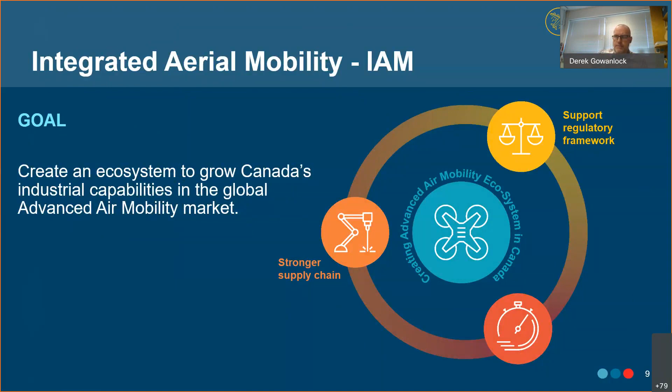To do that, we've basically broken down the program into 2 innovation domains. I'll talk on this slide for a couple of minutes, then we have one more slide to express all this. We have the vehicle domain and then the operational domain, and then we break that down into master projects.

On the integrated design side of things, we're looking at technologies around VTOL propulsor noise, VTOL cabin noise. On the airworthiness and crashworthy structures dimension, we're looking at UAM structure and safety for crashworthiness considerations, simulations to optimize novel configurations for vehicle performance, and investigating low-cost structures for broad VTOL applications.

The other master project, operating environment, looks at testing and modeling simulations around VTOL and eVTOL operations in adverse conditions—icing, rain, urban airflow. We also have research investigating small eVTOL air-to-air, air-to-ground collisions; we'll hear a bit more about that today from Azzedine. This master project also looks at developing operator guidance and certification tools for operations in urban environments, more oriented towards eVTOL all the way up to urban air mobility.

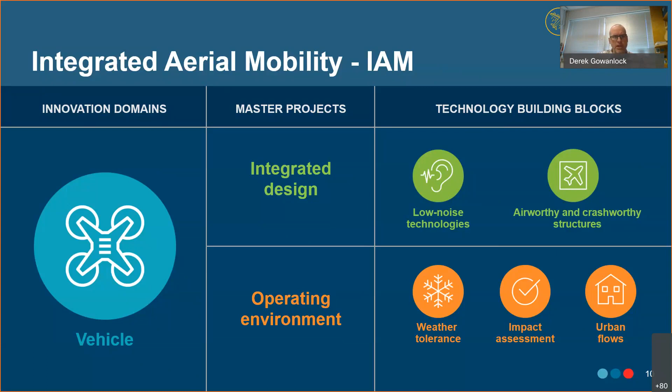The other innovation domain within the research program is focused around operations. Flight autonomy, the master project that I lead, looks at developing and publicly demonstrating safe and effective autonomous flight system algorithms.

We're also looking at detect and avoid flight test technology development and other test technique developments supporting flight autonomous systems, as well as creating validation and benchmarking techniques for different levels of automation. All of that supports the development of regulatory guidance, standards, and information for Transport Canada, as well as for defense applications through the Directorate of Technical Airworthiness and Engineering Support, who are the military regulators.

Finally, we're also very interested in developing measures to assess trust in automation as part of all of this work, both for crew and passengers, but also for the general public.

The fourth master project we have is integrated aerial services, looking at developing aerial robotics technology for inspection and maintenance of elevated structures, as well as for security applications. This is also where we house our counter-drone and traffic management research, including RPAS traffic management, so integrating eVTOLs into the National Airspace System.

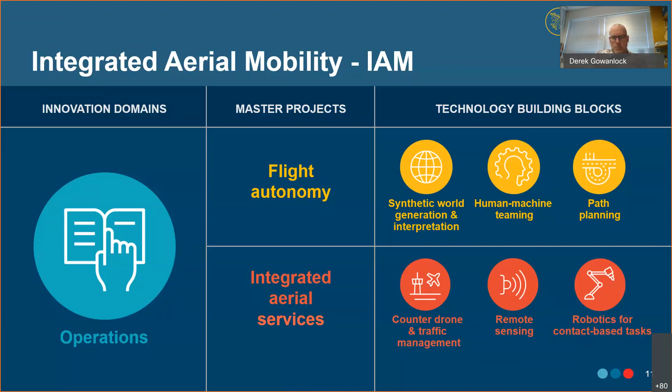One of the main roles of NRC is to inform regulation development and policy development. Within the program, we have tight collaboration with the military regulator, but especially with Transport Canada's RPAS task force. Our research and development program under IAM is tightly linked to the development activities Transport Canada is focusing on. This slide is a quick summary, I won't go through the details, but it's been presented in many forums, and I'd be happy to answer any questions.

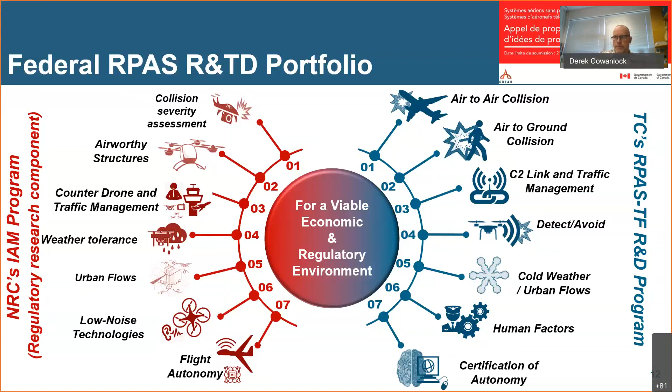Next slide, please. With the high-level overview of NRC and the Integrated Aerial Mobility Program stepped through, I want to spend a couple minutes on our large program, our project around vertical lift autonomy demonstration. I could talk for hours about the project, it's big and diverse, so I'll take just a couple minutes. I'll wrap up with a video, and then turn it over to my esteemed colleagues to talk about their areas of research as well.

CVLAD, the Canadian Vertical Lift Autonomy Demonstration Project, has the objective to demonstrate kit-based technology for advanced autonomous flight systems on both the Bell 412 and ultimately to evolve that technology for demonstration aboard an RCAF Chinook. Our main focuses are around crew workload, hopefully reducing crew workload with the application of autonomy, demonstrating improvements in operational capability and life extension, and helping develop the technology up to TRL-7. We have industry collaboration, which helps link our demonstrations to a viable production path. Ultimately, this work helps culminate in a strategic autonomy capability within Canada, and also helps enable the development of regulation. Next slide, please.

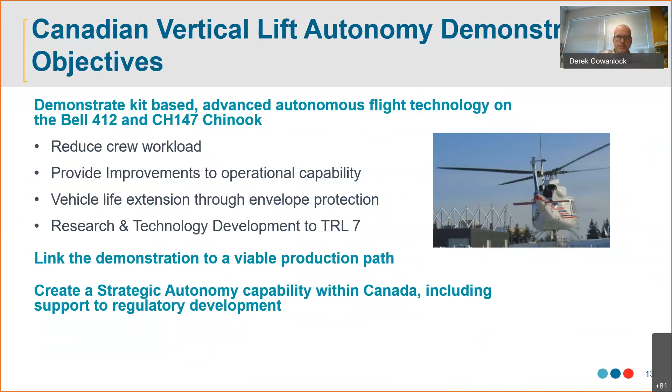This is where I can really get into the weeds, so I'll try to hit the high wave tops. This demonstration project isn't looking at developing sensors per se, or computers or displays—it's more about the algorithms and architectures around autonomy. Our focus is really on architectures, looking at different architectures, which I'll talk about in the next slide. We're looking at technologies and algorithms around perception, generating a world model around the autonomous flight vehicle, and then interpreting that world—what are obstacles, what aren't, what are airborne threats, what aren't—and then developing trajectories or paths around those obstacles to achieve the pilot's mission objectives overall.

Embedded in that is how you manage missions, how you enact supervisory capabilities within the autonomy, and how decisions are made. We're very interested in integration with the flight control system, and what flight control laws are appropriate for autonomous applications, especially with supervised autonomy where the human may need to enter the loop at appropriate points. We're very interested in displays, particularly the cueing—not the physical displays, but the information presented to the pilot, the cues and how the environment around the aircraft is presented.

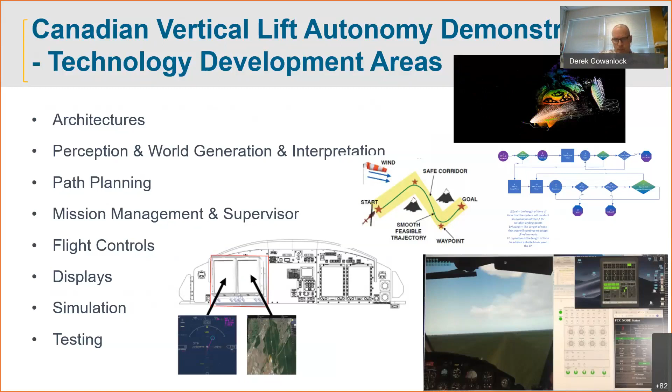All of this involves a great deal of simulation, so we're investing in a lot of simulation capability within the lab to support that development. And finally, testing and demonstrating the technology, developing test techniques, and helping provide that information to the community, the ecosystem, and the regulator. Next slide, please.

CVLAD has three primary architectures we talk about. The first is an evolutionary, initial development capability we're actively working on right now, which we call the Peregrine Architecture. This architecture is developed in collaboration with a system from Near Earth Autonomy out of Pittsburgh. It provides a long-range LiDAR landing zone evaluation capability that we're integrating into our world generation and interpretation algorithms, around which we're providing trajectory planning, pilot cueing, and integration with controls. This is getting us going in the crawl, walk, run phase of things.

And then from there, we build into a much more robust algorithm, which is sort of the strategic autonomy capability for NRC and for Canada, where we have a variety of different perception modalities, a variety of different techniques to develop a world scene, and then permit implementation of a number of different planners for trajectory planning, a more robust cueing system to the pilot, and then integrating that into controls for demonstration.

Based upon that architecture, which is modular, we can support integration with industry collaborators. So we can take industry autonomy cores or algorithm elements, integrate them together to achieve development, testing, and demonstration, depending on the nature of the collaboration, which is the case of how we get from developing technology on the 412 ultimately into the Chinook, in one specific collaboration along that industry architecture theme.

Next slide, please. So ultimately, obviously, there's a lot of detail that I'm skipping over. I'd welcome questions, but I didn't want to take too much time. I want to make sure I give time for my colleagues.

So I mentioned we're starting off with this Peregrine architecture, where we have a LiDAR-based landing zone detection capability and safe landing zone algorithm that gives us a point amongst obstacles where it is safe to land. This is the system that we're actively flying and demonstrating at the moment.

As we go through the crawl, walk, run phase, we start with simulation of the capability, and then we go to open loop testing, where we have the system providing guidance to a pilot who then follows that guidance to make sure that it all works effectively and properly. It also helps us develop our test techniques.

Then we ultimately step into closed loop flight testing, where we feed those guidance signals into the flight control computer, and the pilot who was in the loop now becomes out of the loop, or on the loop, in a supervisory role. We're currently in the open loop flight testing phase of that.

So we've been conducting a number of flight operations over the last several months, here at Ottawa at our Uplands site. Anybody familiar with the aerodrome and where the lab is situated would recognize the picture on the right, which is a top-down view. The airport's in the bottom of the scene, and then we're flying around.

In this case, a little mission flying around the EY Center, which is a convention center near the airport here, just doing a little circuit to land. So that's what we're currently doing in that open loop phase, proving out the system.

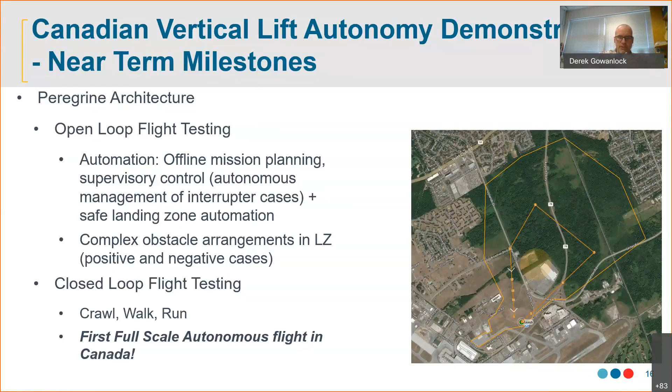Chantal, if you can press play on this. This video shows, hopefully it comes through all right... there we go. So this video shows just that little circuit around the convention center near the NRC.

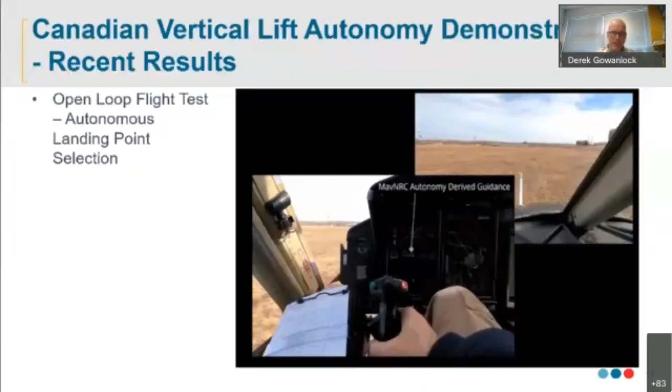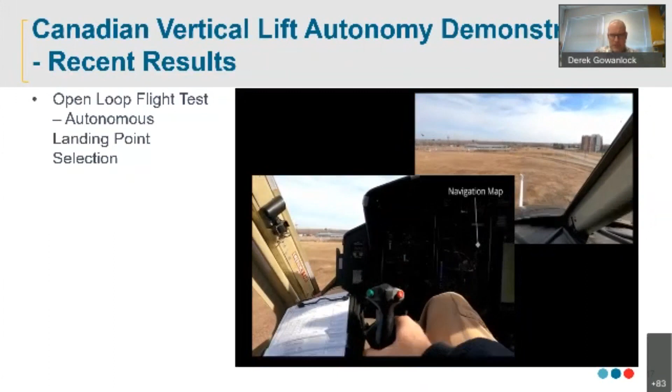The bottom left picture is a cockpit forward picture, you can see our displays. The left display, probably not great quality on my screen thanks to the internet, shows the pilot guidance being provided by the autonomous system. On the right display, it's a top-down navigation display to help with situational awareness.

So we had a broad mission, just a circuit programmed in here, and our autonomous system is providing guidance to the pilot to fly. Not unlike an autopilot, it's very similar to that for that phase of flight.

And then we come around, and now we're coming into the landing. You can see the wind tunnels complex off to the right in the top right image. Ahead of us, in our low-speed test area, we have an open field. We've selected a 30-meter radius circle as our landing zone, and then populated it with a number of obstacles that the autonomous system is unaware of.

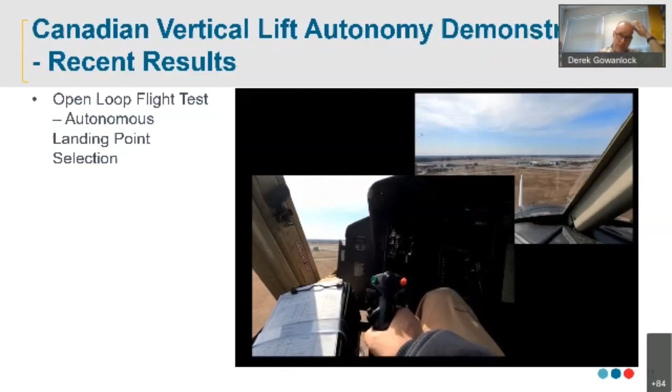Now the LiDAR system is scanning the landing zone as we come in to seek out the obstacles, and we should see some information up on the display. Hopefully that comes through on your version. There's a display provided to the pilot that shows the landing zone coming into view as the system is scanning. In the picture on the right, you can probably see some of the obstacles - they vary in size, and they're not very big obstacles.

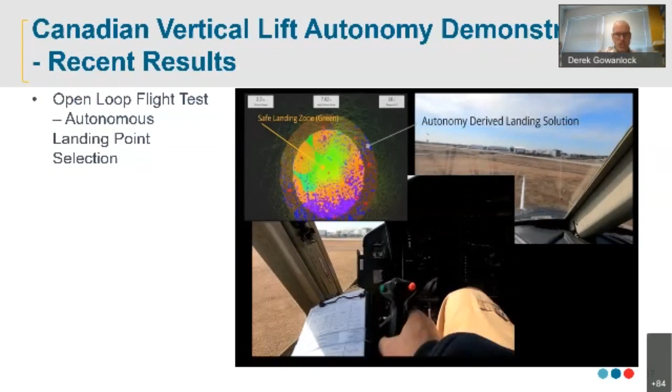The maximum diameter of an obstacle is 40 inches. The system generates a safe landing zone algorithm, shown here as a still picture on the top left, giving us color coding information. In the back, the engineers are looking at this information to assess where a safe landing point is. The pilot gets a display of where the landing point is, a little home plate shaped image.

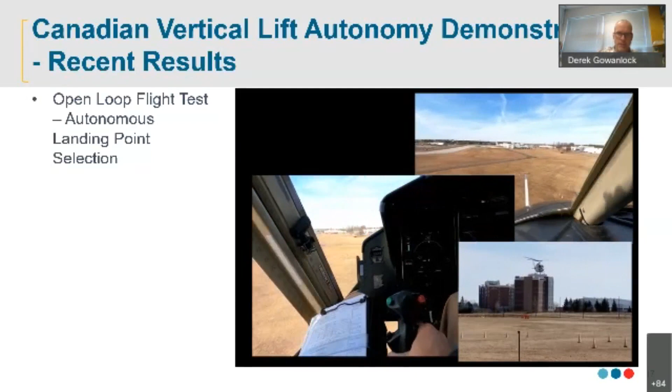Through the flight control system, commanding attitude hold flight control mode in this case, he steers the aircraft over to the desired landing point. Then, once we're over the landing point, we descend to land. That's a sample example of an open loop test that we're doing.

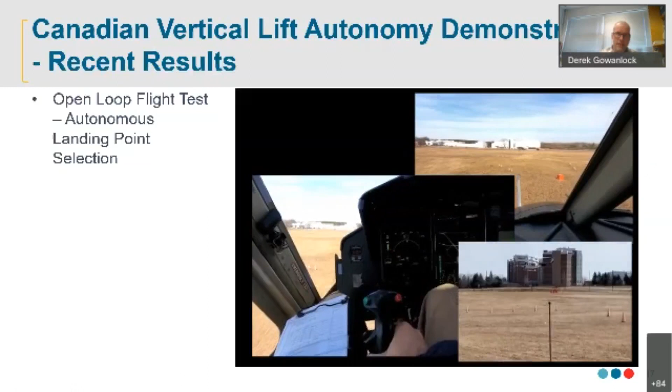You can see some of the obstacles come into view a little better on the top right and in the bottom left image as we incrementally develop the technology. The next step will be to take that guidance information and feed it into the flight control computer, repeating that test and demonstration in a full closed loop fashion, and then increasing the degree of difficulty of those profiles. The demonstration I showed here was a pretty low degree of difficulty overall in terms of obstacles, but as capability increases, we'll increase that complexity.

We also have NASA and FAA participation in that as well, to help glean the bits of knowledge we can generate out of our development activities and help inform the development of regulations, so that as autonomous flight systems are introduced into the market, the regulatory environment will be ready to accommodate and absorb it.

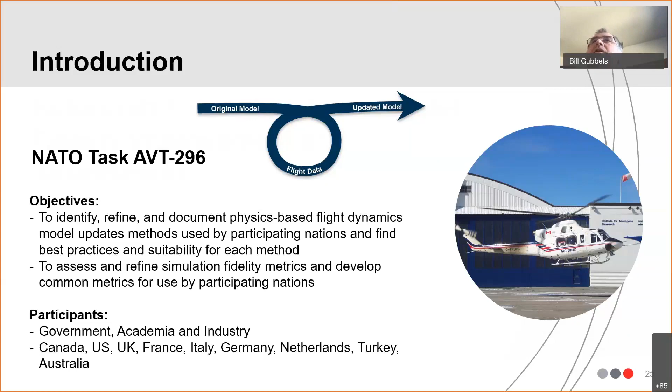The basic idea is using the knowledge gained from flight test data, you take your original baseline model and, using the methods we've determined as part of our group, update that helicopter model to represent one with an improved level of fidelity. Next slide, please.

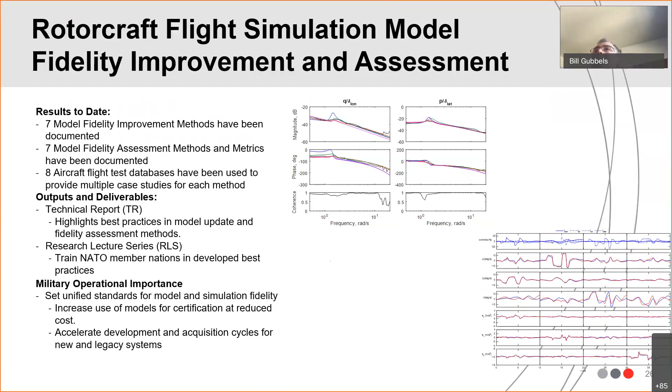So the first two methods, gain and time delay corrections for key responses and black box input-output filter corrections, these methods do not modify the baseline model at all. Instead, the corrections are applied to the external structure of the model, either as single input, single output gain and time delay corrections, or multi-input, multi-output correction filters.

The next four methods modify the baseline model. Method 3 is force and moment increments. You use a comparison between the stability and control derivatives as identified from flight test with those from the baseline model, and from that you can derive force and moment increments or decrements that have to be added to the baseline model to improve the result.

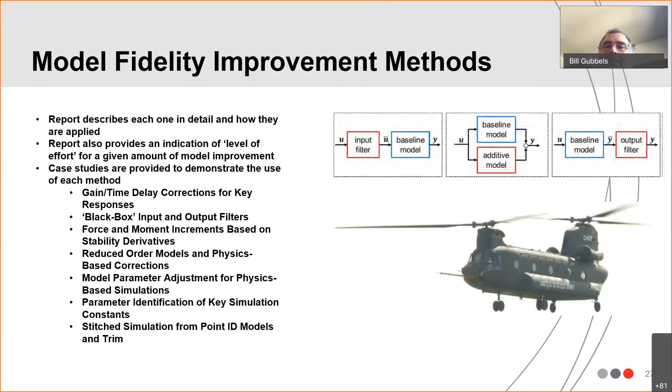A primary question to be answered when applying system identification for improving a simulation model is what validation criteria should be used to evaluate the model quality. How do you know that your model is any good? How do you know that you've improved it? Over the course of this NATO activity, the group has identified 7 methods to evaluate the quality of a model.

The first method involves the concept of maximum unnoticeable added dynamics, also known as MUAD, or as well allowable error envelopes, which is a very similar method with different criteria applied. This is used for determining whether the math model is adequate and if the simulation facility is adequate to accomplish the proposed evaluations. These are frequency domain techniques where the error in frequency response between flight test and simulation is plotted against the allowable boundaries.

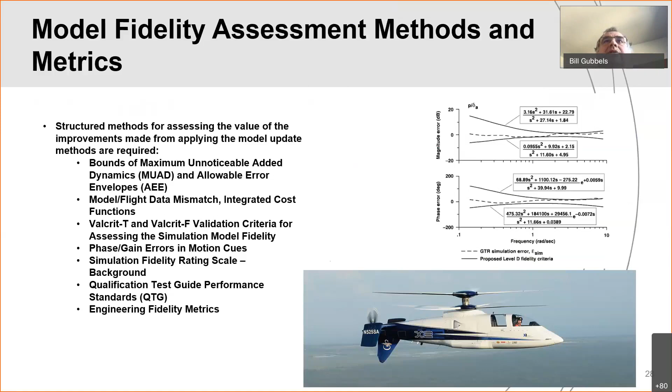So we have methods to update our models, and we have ways of assessing those updates to determine whether what we've done is an improvement. Finally, the third leg in the stool is what data you use to apply these methods. We had a number of aircraft databases that we acquired from various aircraft, done to support case studies in the report demonstrating the different methods and their effectiveness.

Ideally, you'd want multiple different aircraft configurations to test the methods on a variety of cases. Our goal was to find things like single main rotor helicopter, tandem rotor helicopter, coaxial rotor, fenestron equipped, or even a small quadcopter, and we have all those types represented. We also have a variety of sizes, from a 3-pound quadcopter up to a 50,000-pound Chinook, covering the gambit in sizes.

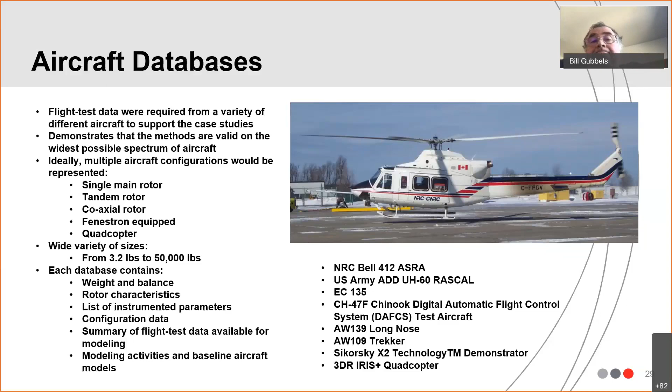So what's the result of this activity? It's mainly a report - this is a large NATO report. It fully describes all the update methods, what fidelity assessment metrics were used and how to apply them, as well as the aircraft databases. The report also includes several case studies or examples for each method, so people can learn from the group and see how to apply these methods.

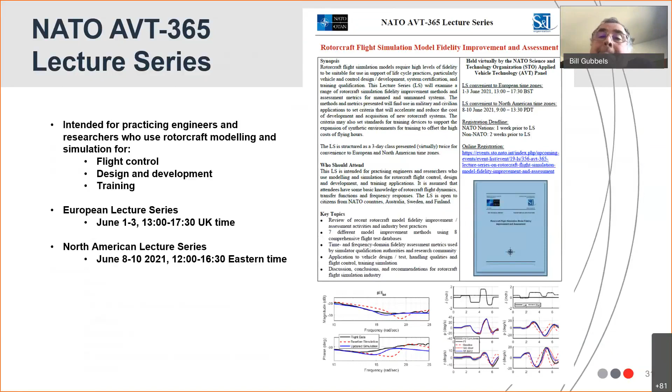My name is Andrew Law. I work in the Aerospace Human Factors Group at NRC, and I really appreciate this opportunity to present a recent study we've done on helicopter pilot workload.

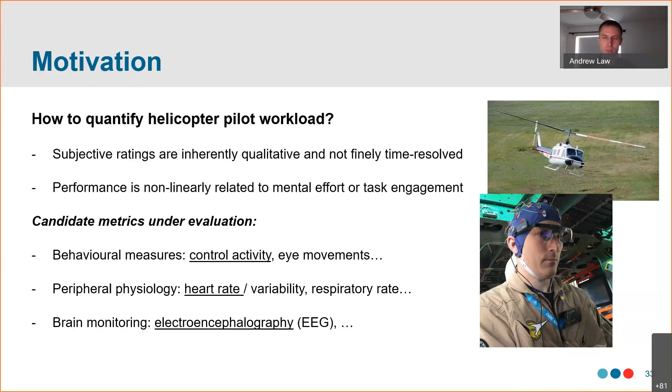The motivation for this work is to develop new methods for quantifying pilot workload in flight. Typical techniques include subjective ratings and task performance metrics, but some challenges are that subjective ratings are not time resolved, and each person has a different nonlinear stress performance curve with hysteresis and time dependency. So we've been looking at other candidate metrics based on behavioral measures, peripheral physiological signals, and brain monitoring techniques. In this presentation, I'll focus primarily on control activity, heart rate, and EEG parameters.

For this study, we developed what we call a virtual target tracking task paradigm that can be flown in our Bell 205 fly-by-wire helicopter. The task involves two displays in the cockpit. The right display provides ownship-referenced target position, velocity, and acceleration using a modified BOSS symbology, and the landing point symbol serves as the target cue.

The left-hand display provides Earth-referenced target information using X-Plane, using two inline follow-me helicopters that serve as the target. For all trials, the target is moved laterally in a pseudo-random manner relative to the initial heading of the helicopter at 3 different levels of difficulty, corresponding to 3 different levels of target velocity. We applied randomization in time and amplitude inversion to try to minimize learning effects across trials.

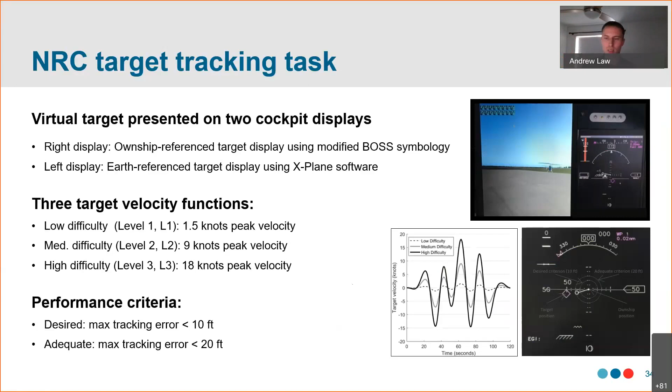In this task, we instructed the pilots that desired performance was to always maintain a tracking error less than 10 feet over the 2-minute trial, and adequate performance was to maintain tracking error under 20 feet.

So for this particular study, we configured the fly-by-wire system on the 205 with attitude command, attitude hold, yaw and heave axes under automated control.

For the low difficulty condition, the target is barely moving, so the aircraft doesn't really move very much relative to starting position. But for the high difficulty trials, the position is varying plus or minus 120 to 150 feet laterally in both directions.

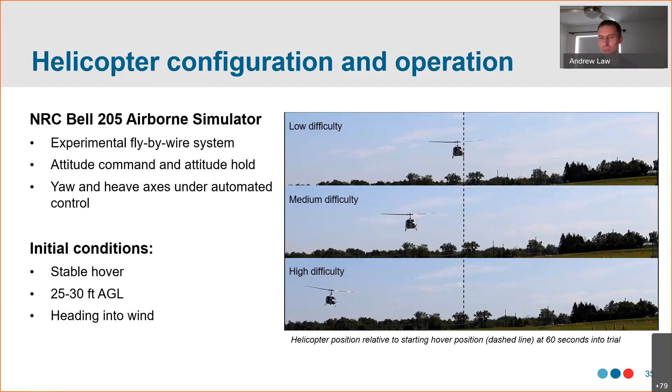We did these experiments with 2 test pilots, 2 NRC test pilots. They alternated as the safety pilot in the left-hand seat and the evaluation pilot on the right side. The evaluation pilot wore the physiological sensors for heart rate and for EEG.

The study took 2 weeks for data collection, and each pilot served as the evaluation pilot for 3 flights. In addition to the physiological measures, we did record all the aircraft state information, target state information, control activity. We did record eye tracking with Tobii Pro glasses, but we had some challenges with ambient light saturation of the eye tracking sensors, so that's not included in this presentation.

For subjective ratings, we use the Cooper-Harper handling quality rating scale. The first flight for which each pilot served as evaluation pilot, we treated that as a task familiarization flight. So the results that I'm going to show are for flights 2 and 3 per pilot.

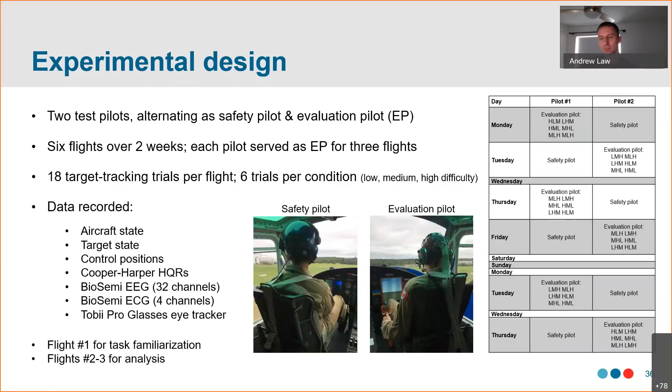To look at tracking performance in this task, we computed the root mean squared difference between target and aircraft position over the full 120-second trial.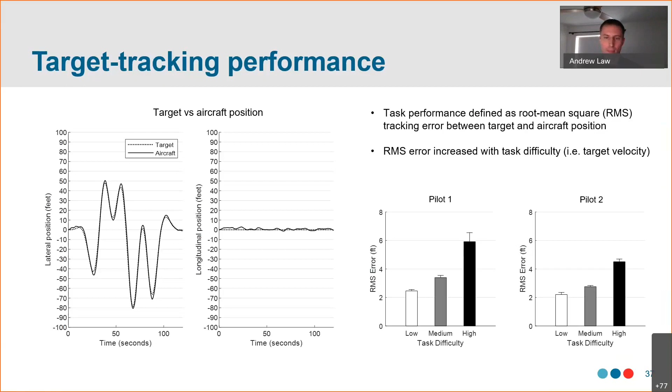For subjective ratings, we decided to use the Cooper-Harper handling quality rating scale. For those that are not familiar, the pilot has to evaluate performance relative to desired and adequate criteria, and then within those bounds, identify the level of pilot compensation required to achieve either desired, adequate, or to attempt to achieve adequate if adequate is not attained.

In this particular case, we found that for the low and medium task difficulty, the pilots were able to achieve desired performance, which was maintaining a distance of less than 10 feet from the moving target. But the compensation ranged from minimal to moderate, going from low to medium difficulty. In the high difficulty trials, the fastest velocity trials, the pilots were able to achieve adequate performance, and they usually reported extensive compensation required in that case.

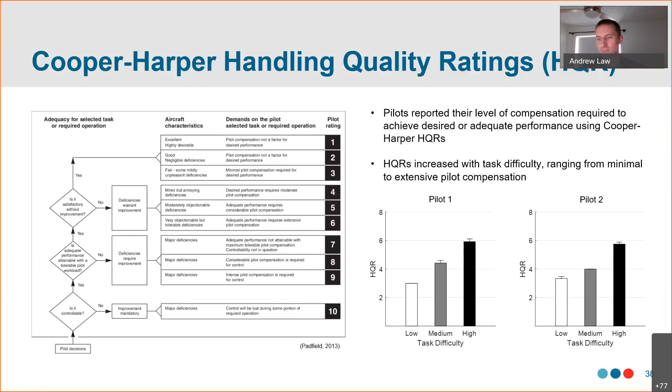We then looked at control activity, and we used a metric that has been used previously by our group and other groups internationally. It's called the Dynamic Interface Modeling and Simulation System Product Metric. All it is the product of cyclic control reversals and cyclic standard deviations in a 3-second moving window.

We applied that metric for the lateral axis of the cyclic and longitudinal axis of the cyclic separately, and then summed together and averaged over the 120-second trial. As you'll see on the right-hand side, the control activity metric was proportional to task difficulty, similar to the tracking error in the HQRs.

So these three analyses essentially confirm that the manipulation of pilot workload that we intended was successful.

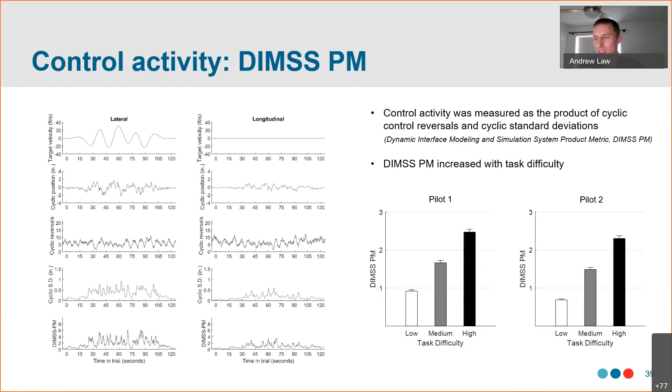We then took a look at heart rate. Heart rate was measured from electrocardiograph signals recorded in flight. On the left-hand side, I'm showing an example trial where you see the lateral target velocity at the top, and then a lateral cyclic position, second row. Third row is an ECG recording. Bottom row are the interbeat intervals derived from ECG.

From interbeat intervals, we can compute heart rate in different windows. We can do heart rate variability analysis. To keep it simple here, I'm just showing the average heart rate per trial. We did have to do a normalization for each flight separately because there's non-stationarities across time.

If you measure someone's heart rate on a Monday doing a task and you have them come in and do the same task on a Tuesday, there might be an offset in heart rate based on many factors that are outside of our experimental control. So we normalize the heart rates within each day and then combine the results.

What you see on the right-hand side are a normalized heart rate as a function of task difficulty. And again, what we found is that there's a proportional relationship here as we saw with the other metrics. So there's a lot of redundancy between these different metrics, which is a good thing.

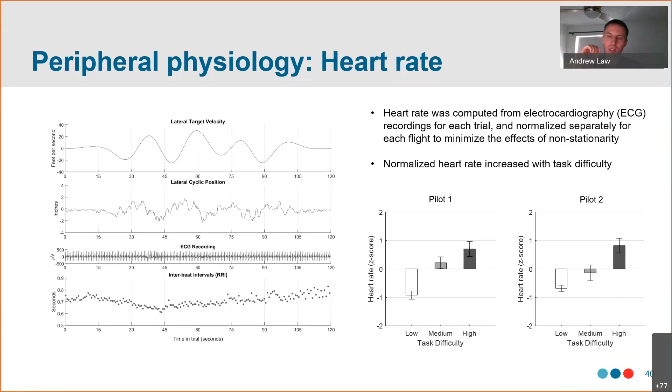So then we looked at EEG. EEG is a very complex signal to understand, and the reason for that is the EEG signals are time varying, frequency varying, and spatially varying. And the signal to noise ratio is often very low. So when we go into a dynamic and very noisy environment like a helicopter cockpit in flight, a lot of these subtle differences that you might pick up as a signal in a controlled laboratory environment are just in the noise when you go into the real world. So we tried to keep it as simple and straightforward as possible.

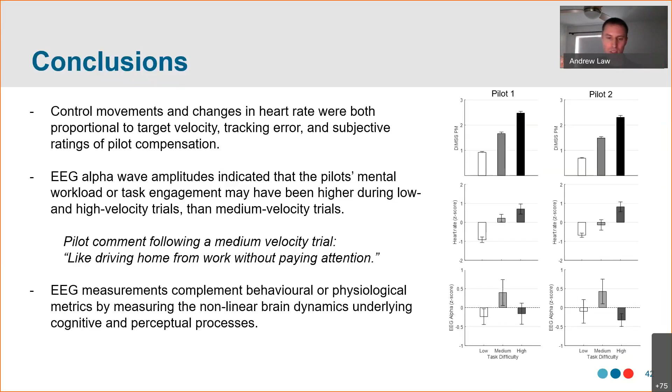And we all know what that feels like. We're kind of on autopilot. Eyes are open, we are making movements on the steering wheel, corrective action, but it doesn't require full max attention. And so that's what we think the EEG measures were telling us that was not apparent in any of the other metrics. Main takeaway here is that pilot workload is a multidimensional problem, and to really understand what's happening, we need different metrics that are sensitive to different dimensions within that space. Next slide.

So where are we going from here? Obviously, what I've shown you today is a preliminary study with 2 pilots. We'd like to explore doing this with a larger sample to see if these results hold. The problem of vibration and electromagnetic interference in the helicopter is critical with EEG, and so we're working on adaptive filtering techniques to try to do a better job at extracting signal from noise.

Calibration of these indices is also challenging. As I mentioned before, there's a lot of non-stationarity in any type of physiological signal. So how do you baseline your measurements, or how do you benchmark them? That's an area of study. Going back to one of the references I mentioned earlier, in 1995 Alan Pope at NASA did this biocybernetic loop experiment in a controlled lab. We'd like to move in that direction so that we can process the data in real time, and we can toggle display information on or off based on real-time inference of cognitive state, or change the control paradigm itself. So those are different areas of future direction.

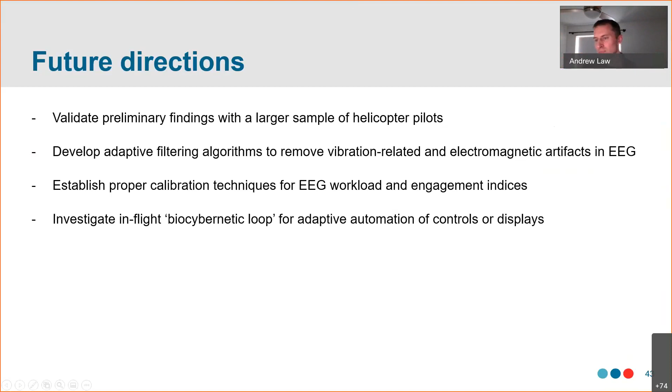And in conclusion, these are some of the references for those that are interested in our recent papers presented at VFS. Others are more some of the background to our work. I'm happy to address any questions either during the session or offline.

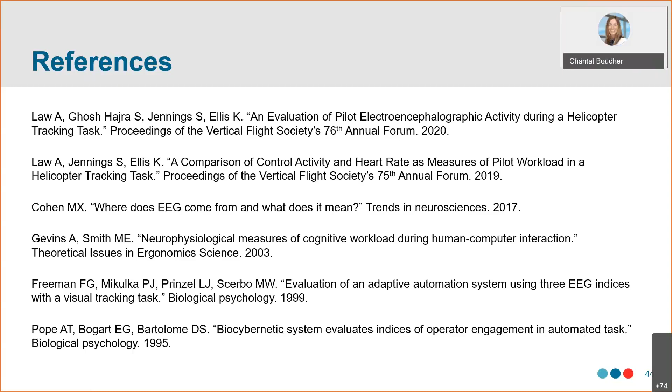Hello, everyone. Thank you for coming to this presentation. My name is Azzedine Dadouche, and I'm a research officer at the NRC Gas Turbine Lab. During this maybe 10 minutes of talk, I'll be talking about drone impact testing that we have completed over the last 3 years here at the NRC. I'll give a brief summary, and then, of course, I'll be open to answer any questions.

The objective of our series of projects, which we started about 3 years ago, is number one: to assess the damage severity that may result from drone impact on aircraft structure or windshield. The other objective was to support regulators, because so far there is no clear regulation about drone operations and zoning for drone operation. So this is to support regulators such as Transport Canada and Defense, such as DND or DRDC, with experimental data and damage analysis to create evidence-based rules for drone airspace usage. The third objective of our investigation was to validate and fine-tune advanced FEA modeling and simulations so that we can assess the damage severity without the need to go for experiments.

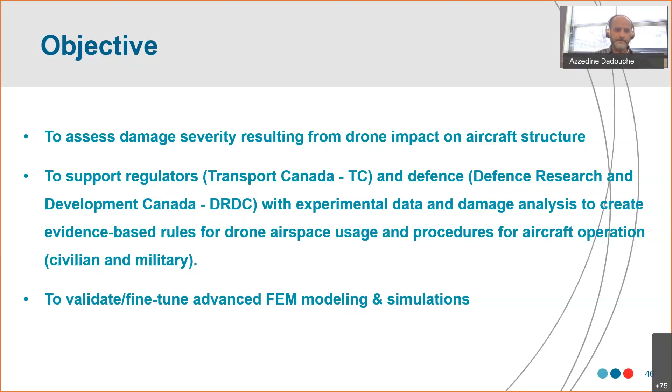Next slide. I'll first start by saying a few words about NRC expertise in terms of bird impact or bird ingestion testing for engines. The NRC is one of those R&D centers throughout the world that support aircraft and engine manufacturers to certify their products against bird strikes. The first windshield and aircraft structure bird impact test was completed at the NRC back in 1965.

This was before I was born, so a lot of people were doing that at the NRC. We have a number of cannons available for use, depending on the impact, the projectile size, and the speed you would like to have the impact at. We have cannons as small as 3.5 inches in diameter and up to 43.8 centimeters, which is 17.25 inches in diameter. The top and middle pictures show the 6-inch cannon that we use mainly for bird impacts, and the bottom one is the biggest cannon, which we built in collaboration and partnership with Transport Canada and DRDC. This is the drone cannon, or as we call it, the super cannon.

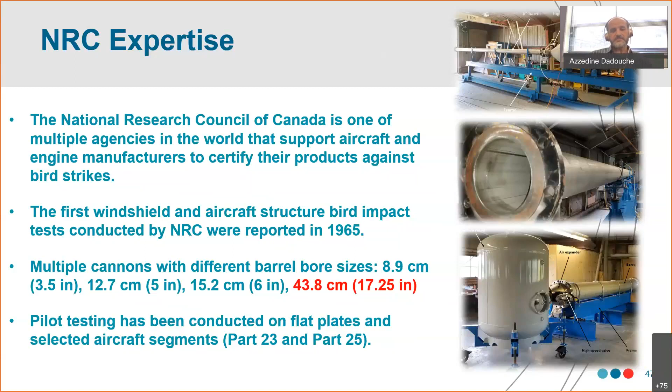We have completed pilot testing on flat plates to validate some simulations, as well as on aircraft segments of Part 23 and Part 25 categories. Next slide. In this presentation... can you click again, please, so that you can see the picture there? Thanks. Again, yeah, another one.

I'll be talking about the Part 25 aircraft testing. The objective for this was to assess the damage severity on the aircraft systems, and also study the risk of collateral damage and the risk of fire. As you can see here, we have selected 3 main systems of the aircraft.

On the left picture, you see a wing of a transport category aircraft. This is a huge wing, and we had to slice it into 3 portions so that we could fit it into our test facility for impact testing. On the top right is an empennage, a T-shaped empennage of a transport category aircraft, which also had to be sliced into 3 main pieces: 2 portions of the horizontal stabilizer and 1 central portion of the vertical stabilizer. And the bottom sketch shows the structure of a windshield that we have also tested.

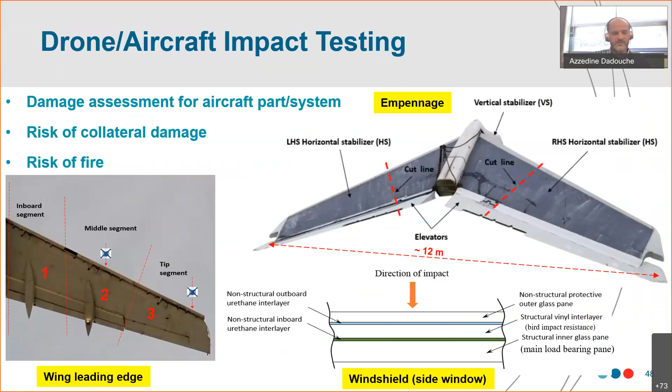As you can see, the windshield for this aircraft is composed of 3 main layers: the non-structural protective outer glass pane, which is the external one, then the medium structural vinyl interlayer, and then the structural inner glass pane. I'll be speaking about a few tests that we have done on this segment. Next slide.

This is the setup for the wing leading edge testing. For the wings you have slats, and depending on your flight configuration or altitude, you may have the slats fully deployed or fully retracted. The objective here was to have impact testing done on the wing leading edge at altitude up to or under 10,000 feet, which is about 3 kilometers, and we know that the maximum speed an aircraft can operate at is about 250 knots.

We have also done other tests at 140 knots, which represents kind of an approach speed for such an aircraft. So the speeds here, as you can see in this table, are 140 and 250. The 140 was deployed because it represents the approach speed of the aircraft as well as the drone, so this is the addition of two speeds.

The top left picture shows the test configuration for a wing with fully deployed slats. The bottom right picture shows a portion of the wing with a fully retracted slat, and this test was done at 250 knots, whereas the other one was done at 140 knots. The other picture shows the drone in its sabot, ready to be launched against the test articles.

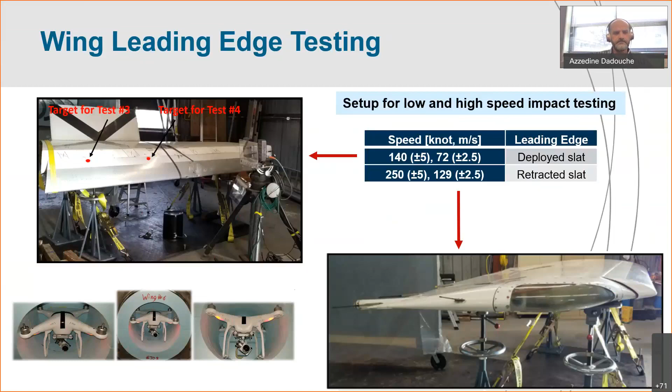Here I'm showing a video of drone impact at 250 knots on the wing segment. The wing here is fully retracted, so this represents kind of an impact under 10,000 feet.

Yes, go ahead. Oh, you don't see the video. We haven't seen it. There you go. Yeah, it sounds like I may have just a little small technical issue to play the video here. Not moving. Do you want to keep going, maybe? Yeah, sure. Okay.

So next, here you will see pictures of the resulting impact. As you can see, there is significant damage to the slat here. It's not very severe, so we didn't get to the wing leading edge itself, it was just slight slat damage.

After the test, we tried to deploy the slat, and it was impossible. The slat was stuck on the wing, which may be a bit of an issue if the pilot tries to land, as the slat cannot be deployed. In the picture at the very bottom you can see the battery, it was severely damaged and it was burning, a few feet beyond the test article.

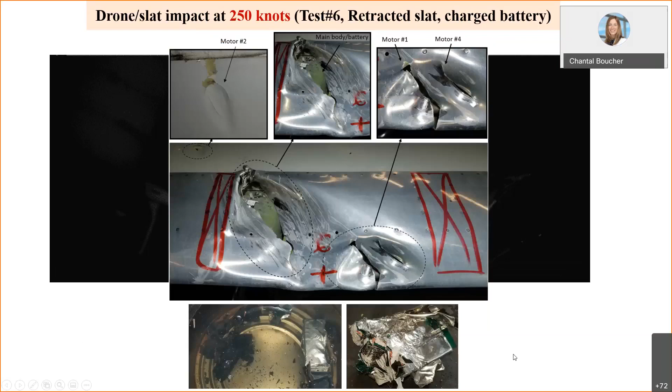Next slide, let's just try again. Anyway, so it doesn't work for this video.

So let's see, this is another setup, this is for the empennage testing. The top left picture shows the setup for one segment of the empennage, the horizontal stabilizer, and where the test target is located, as you can see, a round circle between the leading edge rib number 20 and number 21. The right-hand side picture shows the vertical stabilizer setup.

The vertical stabilizer in that case was tested in an upside down configuration, because this was the best way to have it set up properly, and there were also some other safety reasons that forced us to do it that way. Next slide.

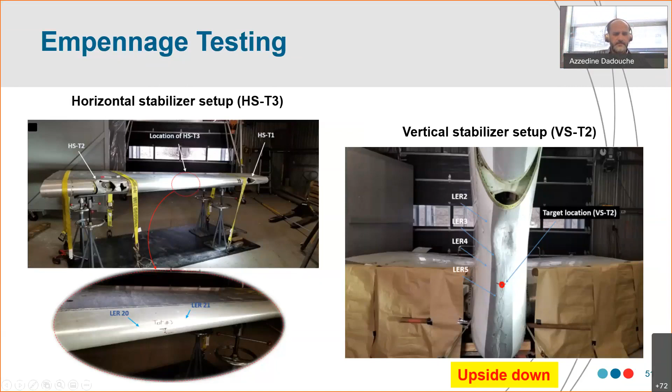Another test was done on the other segment of the horizontal stabilizer, and this was done because we wanted to compare the impact or damage severity between a bird and a drone. The bird we used in this test had the same weight as the drone, about 2.6 pounds. As for the cannon, we replicated the same strapping mechanism that was used on the drone, so that we replicate the same boundary conditions.

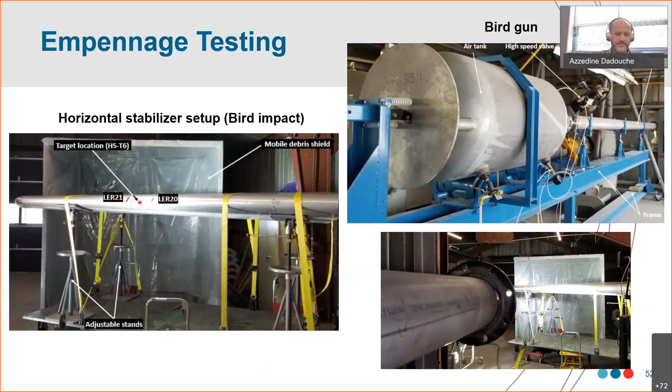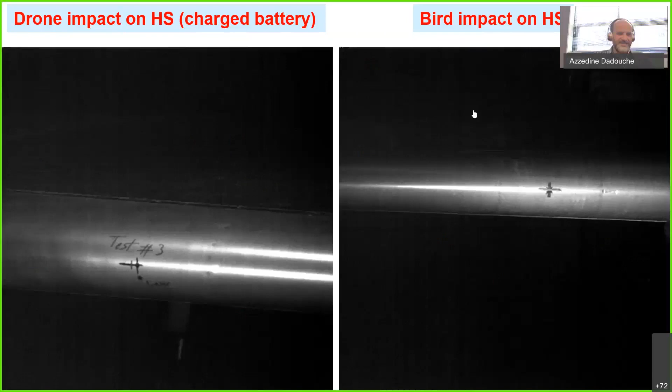Okay, hopefully this video is going to work this time. Hopefully, yes. So the left-hand one, please. Okay, voila, so it works.

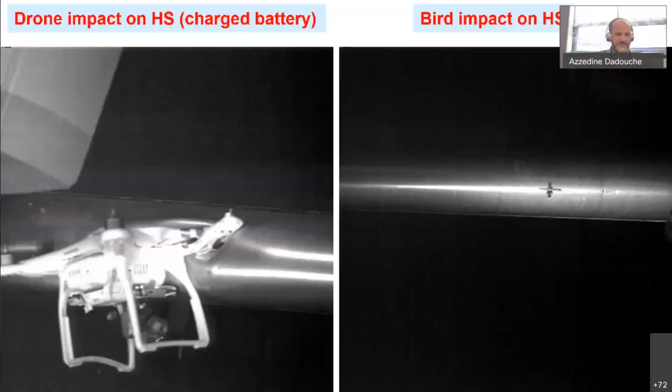So drone on target. This was done with a fully charged battery, and the leading edge was completely destroyed, along with a few motors. The main body of the drone with the battery landed inside. The battery overheated and ignited, and there was a lot of smoke in the area, so we had to take that segment outside. There was a lot of damage to the leading edge ribs as well as to the front spar.

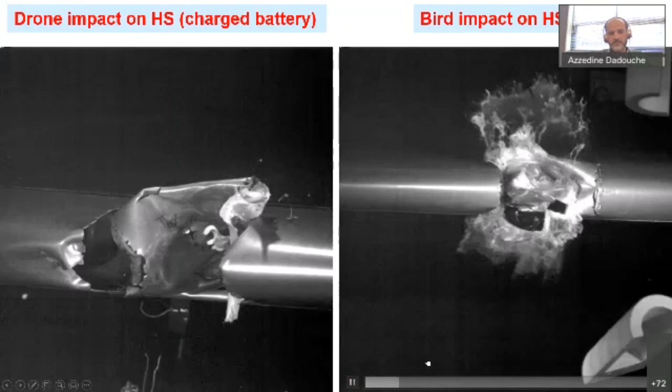Next video, this is a comparison with the bird. To our surprise, the bird made it through as well. The bird needed to be protected in a bag so that we reduce the mess, and the bird made it through the leading edge. The damage was not as severe as the one with the drone, but still there was damage to the leading edge as well as damage to the front spar.

This is another test we have done on a windshield, again for Part 25 transport category aircraft. As you can see on the left-hand side picture, the window of the windshield was supported on a special frame while respecting the layback angles of the windshield. The top right-hand side picture shows the cannon as well as the cameras.

I don't have a video for that test, but I have pictures extracted from the video where the impact at 250 knots caused a significant cloud of glass fragments as a result of the impact. These generated glass fragments were present at the outside as well as the inside part of the test article.

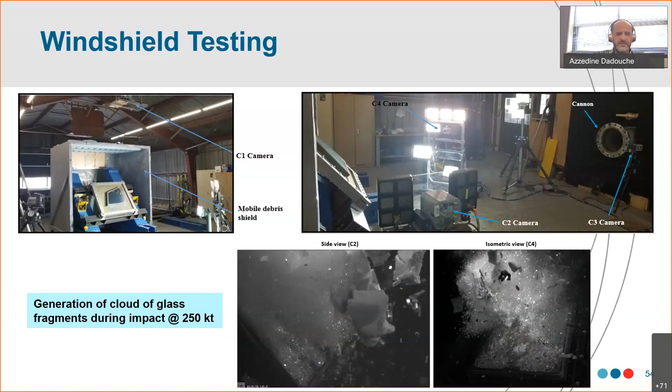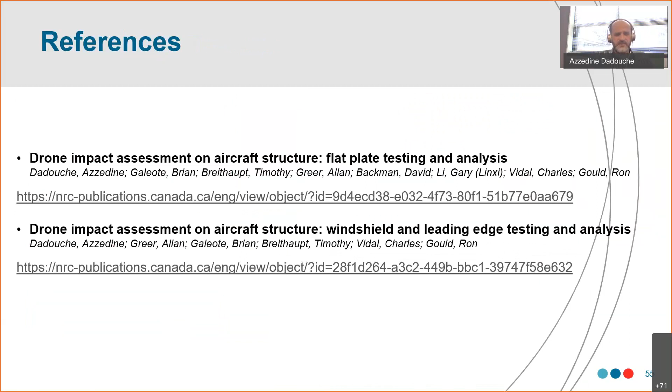Next slide. A lot of details. We have published reports on this test, and you can find them under those links. They are open to the public. If you have questions, please let me know.

So our future: of course we have done a lot of testing on Part 23 aircraft as well. We have just finished the test, and the report is being written. It may be public for people in a few months.

Future studies - we are now working on a different project for Part 25 transport category aircraft, where we would like to study the impact on the windshield while mounted on its cockpit, because the test we did on that windshield made us worry about what would happen to the pilots. I would like to have a test with the full cockpit and have a witness plate with a lot of instruments to study the effect on the pilots as well as the aircraft.

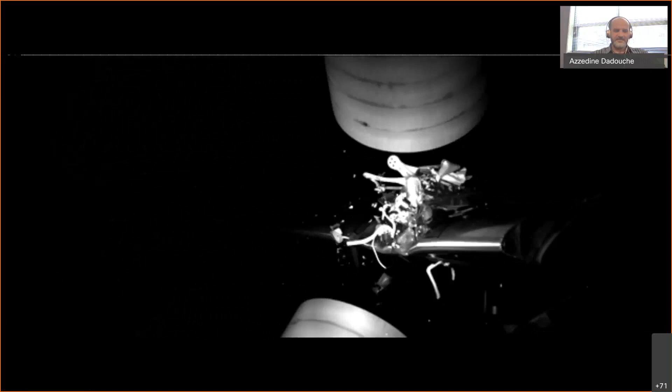Let me try to see if I can bring up your video that we didn't see. The drone was completely destroyed as a result of the impact, shattered all over the place.

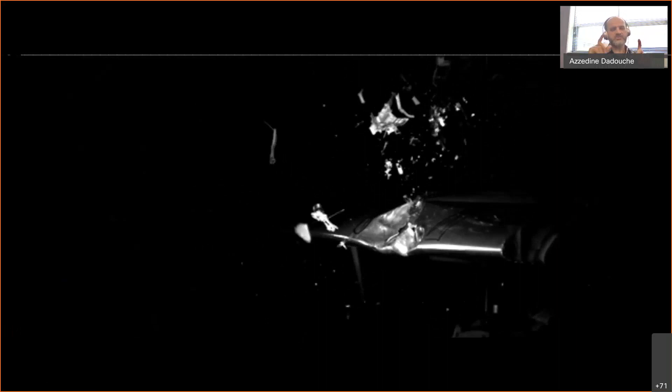This drone was used - why was this drone selected for the testing? The reason is this is the most popular drone which is being purchased by our Canadian fellows, so we wanted to use the drone that's in service.